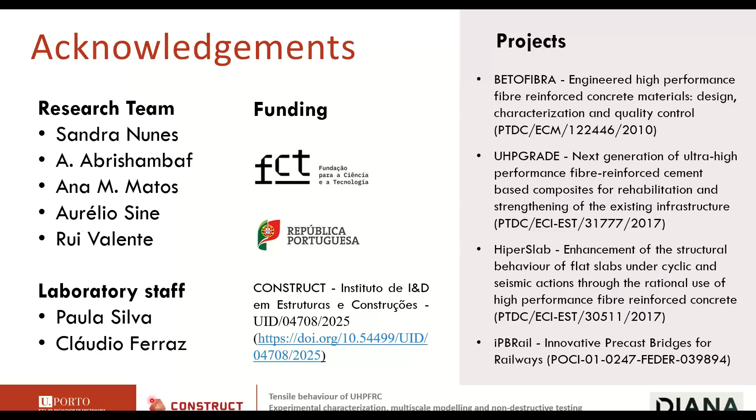So first and foremost, I would like to acknowledge all the persons that contributed to the work that I'm going to present to you today. It's far from being a work from a single person. So I'd like to thank Sandra Nunes, my colleague, who really started this research line here at Porto back in 2014, maybe, in this project over here, and then Amin Abrishambaf and Ana Matos, Aurélio Sine, Rui Valente, so all the researchers that contributed a lot to what you will see here today, and also to the laboratory staff that did a lot of work on the experimental part of what I'm going to be describing.

So, what is UHPFRC? That's I would like to start here. So, it's an amazing material, actually. In very simple terms, it's a composite which has a cementitious matrix, and fibers, which are usually steel fibers.

So the matrix, you can develop your own, but it's readily available today as premix that we can acquire. Typically the matrix is constituted by cement, silica fume, and then other supplementary cementitious materials like fly ash, limestone powder, many options we have. So the water binder ratio is very small, below 0.2. And of course, we need super plasticizers and other admixtures to make the material self-compacting, which is also a very attractive feature of this material. So it's flowable and doesn't need vibration.

So to have the properties that we need, typically we have to introduce a large amount of steel fibers, much larger amount than standard fibre-reinforced concrete. So usually short steel fibers, as you see here, and typical dosages between 160 and 320 kilos per cubic meter, which corresponds to fiber volumetric fractions between 2 and 4%.

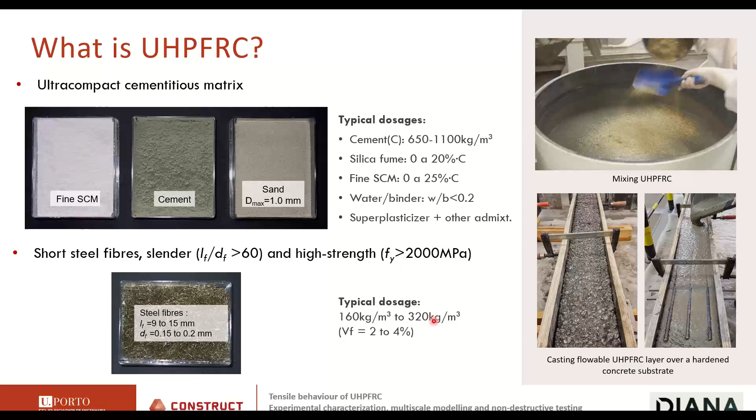So the mechanical properties are really distinguishing. So this material really stands out from conventional concrete. So the unit weight, it's not much heavier than standard concrete. The compressive strength in typical compositions can vary between 130 to 200 megapascals without heat curing. If we have heat curing procedures, we can get higher values sometimes.

Yeah, so it has a high limit of elasticity. So the stress at first cracking can vary according to the composition, but typically between 7 and 10 megapascals. And depending on the fiber content, we can have tensile strength, post-cracking tensile strengths that can go up to 16. You can see larger values, but these are the most typical ones.

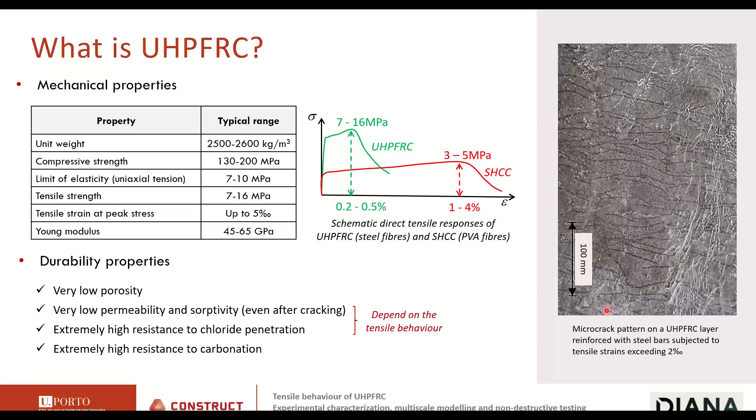But some of these durability properties depend on the tensile behavior. If you have a UHPFRC that is capable of forming this tight array of cracks, then it means it can maintain its durability properties even under large tensile strains.

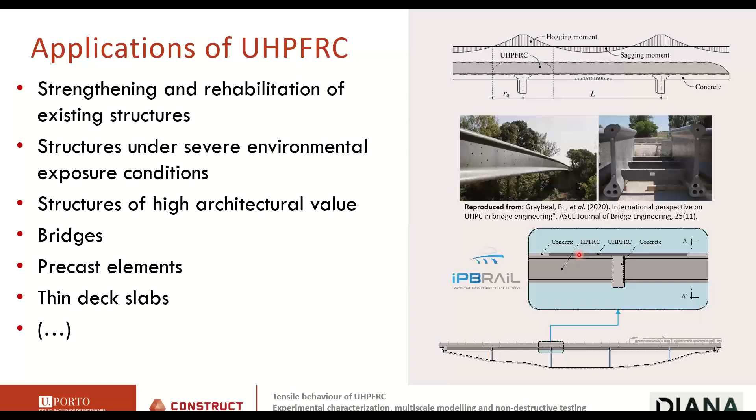In precast elements, here at Porto we had a recent project where we tried to validate the concept of using UHPFRC in the hogging bending moment region of precast bridges.

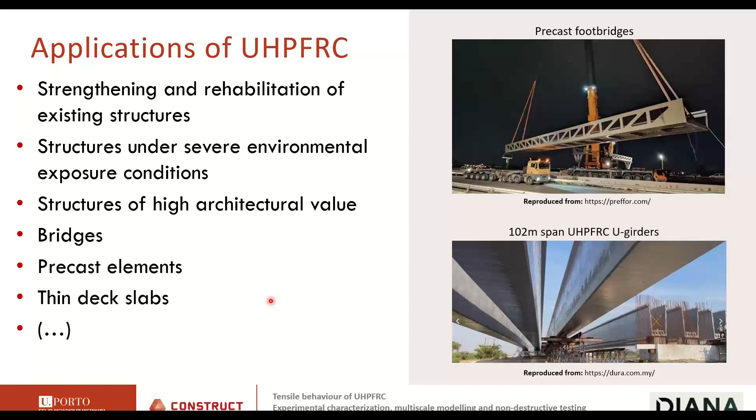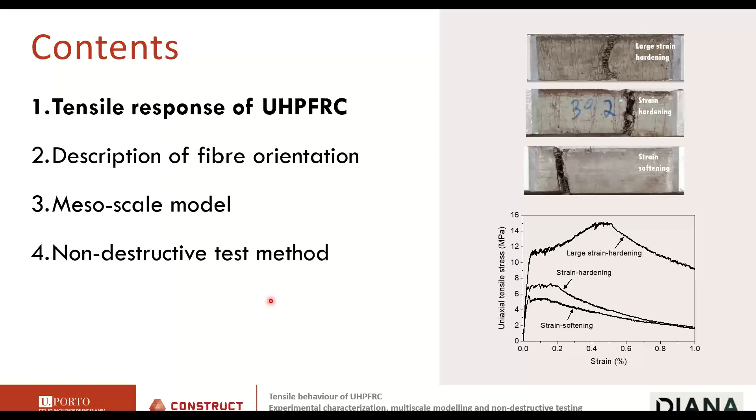So the contents of my presentation will be as shown here in this slide. I will start by making a description of the tensile response of UHPFRC based on what we see in experiments.

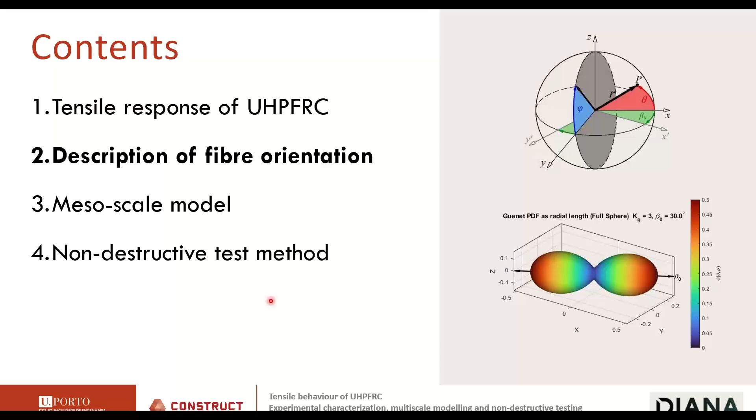Then I will discuss how we can describe fiber orientation, because as we will see, fiber orientation is very important to the tensile response. Then I will show a meso-scale model that is able to predict or simulate the tensile response of the material.

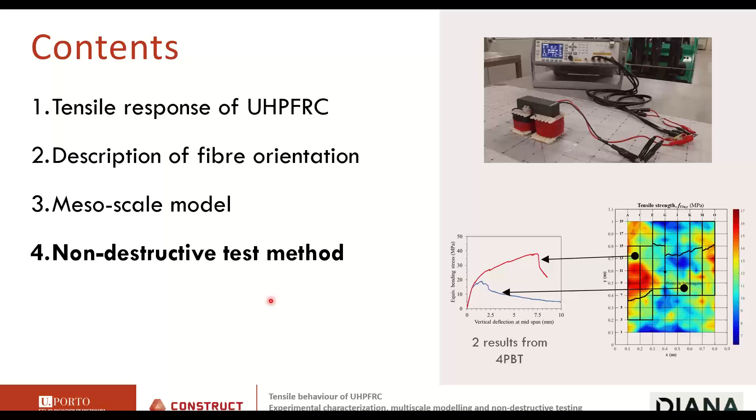And finally, a non-destructive test method that we can use to get the properties we need to feed our models, so that we can get the tensile response, which, as I will tell you, is a function of the fiber content and fiber orientation.

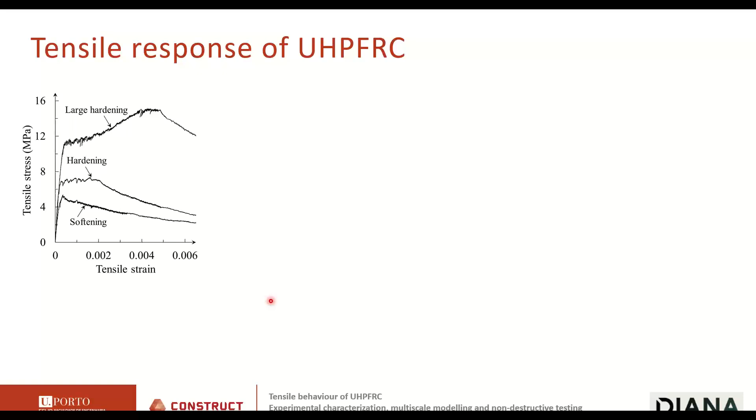So the tensile response of UHPFRC is well illustrated here in this plot. All these curves have been obtained with the same cementitious matrix, same types of fibers, but different fiber contents and different fiber orientations.

Typically, if you want to do a structural analysis or a finite element analysis, you can model this behavior by a bilinear law. It's sufficiently accurate to have a bilinear law here up to peak stress.

And so this part of the constitutive law describes the stress versus strain behavior of the material before you get to the peak stress, because at peak stress, one crack will localize somewhere along the specimen, and then all the deformations will be localized on this crack.

So from the peak onwards, instead of a stress-strain model, we need a stress crack opening model, like what we do for concrete.

So in the context of finite element analysis, this part of the constitutive law is independent of the finite element size, while here you need to define a fracture energy and then use the crack band theory to apply in the finite element analysis using continuum elements.

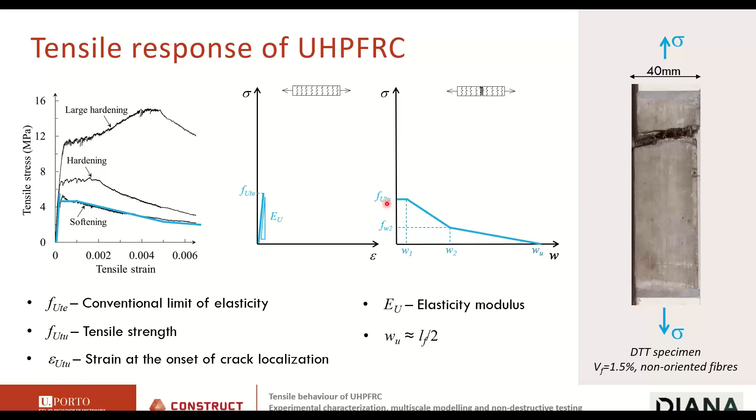So in this case, we need a linear elastic branch up to the peak stress and then a stress versus crack opening relation for the post-peak part of the tensile response. So in this case, the post-cracking tensile strength is smaller than the conventional limit of elasticity.

So tensile response is decisive in many structural applications and depends on the fiber to matrix interaction. So the way we develop the mix design can be tailored to get the behavior that we want. It depends on the fiber content, which of course can also be tailored in the mix design, but also depends on the fiber orientation, as we have seen.

But the fiber orientation depends on external factors that we cannot control when we are designing the mix. It depends on the geometry of the mold, on the placement process, and on the rheology of the material in the fresh state. Some evidence here taken from the bibliography.

So here, this is a vertically cast panel from which several specimens were sawn to test under uniaxial tension. And you see here the range of responses that was obtained. This is described in the doctoral thesis of Oesterlee from the EPFL.

So the same material, same theoretical fiber content, gives a very large range of tensile responses in the same panel.

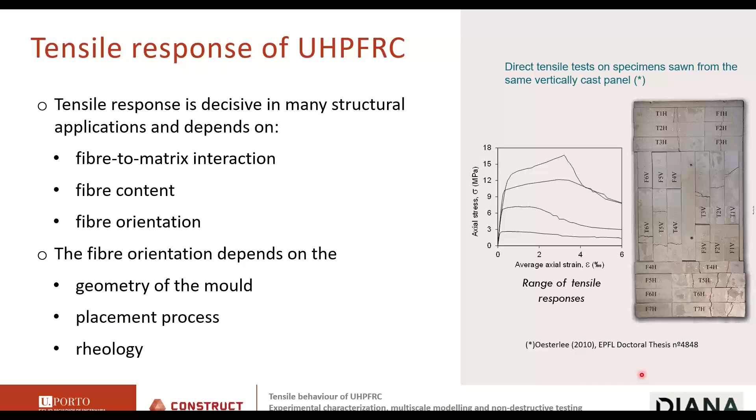And here, another interesting result is shown. This is the same UHPFRC mix that I described at the beginning of this presentation. We can see that the black curves correspond to specimens with 3% of fibers and the light gray to 1.5% of fibers, so half the fiber content.

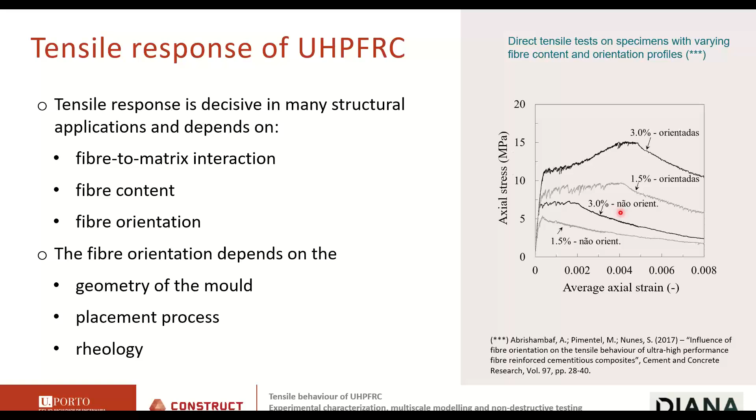What do we see? If we orient the fibers properly, we can have a better tensile behavior than what we would obtain with twice the fiber amount, but with the fibers not oriented. So the orientation of the fibers can have an effect that is even more important than the fiber content.

So to sum up, there's no intrinsic tensile response to this material. It depends on how you cast, and on the factors that I've described in the previous slide. The tensile response may be direction dependent, as could be shown in the tests before. The tensile response of the material in the structure can be different from that obtained in laboratory tests. And typically, this leads to overly conservative design approaches because designers need to cover worst-case scenarios.

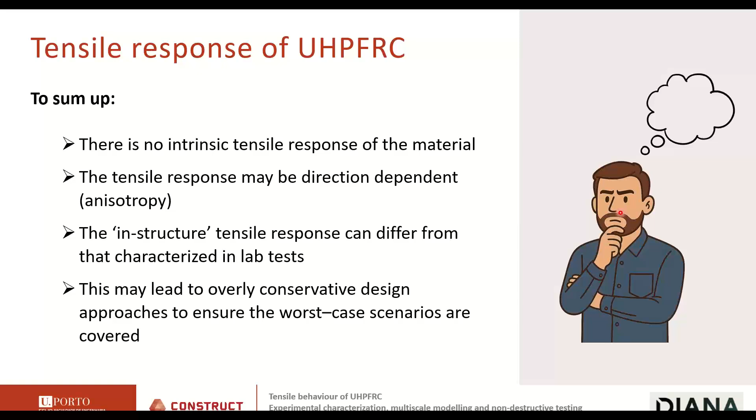So, which questions do we want to answer? They're not easy questions. Can we model the effect of fiber content and orientation on the tensile response of UHPFRC? Can we really get the stress elongation curve under direct tension observed in tests with a dedicated model? Can this model provide us the micro crack spacing? Can we describe an anisotropic tensile behavior? Can we use this information for analysis at the structural level to scale up this information? And also very important, can we get information about fiber content and orientation without destroying my specimens, using a non-destructive testing technique? These are the answers we will try to provide during this presentation.

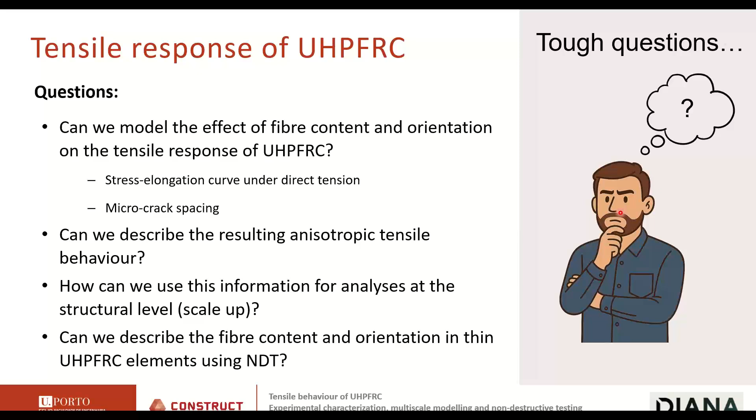We need to have a description of the fiber orientation. This can be very complicated, but at the end we will need only very simple scalar parameters. The orientation of a fiber can be described by two angles: the orientation angle theta, and the azimuth. Imagine the JK plane is your crack, and theta equal to 0 is a fiber perpendicular to your crack. Theta equal to 90 degrees is a fiber parallel to your crack, so it's not working. The azimuth is the other angle needed to completely define the fiber orientation state. P here is the unit vector in the direction of the fiber.

The most complex and most general methodology to describe the fiber orientation is through a fiber orientation distribution, which has to have some properties that we will discuss, using some stereological principles to get the information we need. A simpler way is to use second-order orientation tensors, which can also be helpful, but even simpler is using scalar orientation parameters, and we will focus a lot on this one.

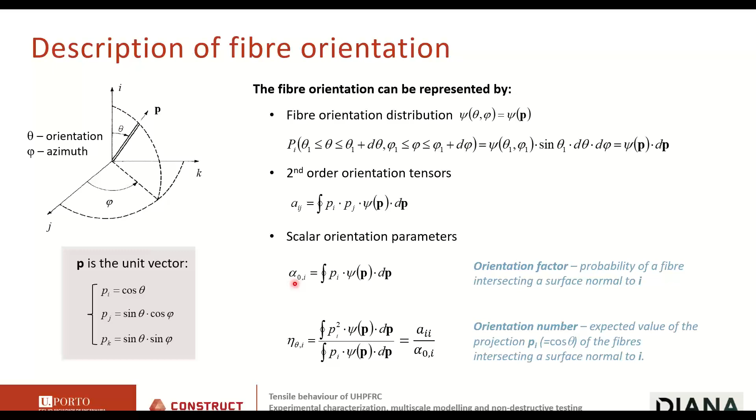So the fiber orientation factor. You have here the definition, but I will go back to this. The fiber orientation factor can be seen as the probability of a fiber intersecting a surface normal to direction I. This means, if this is a probability, the maximum value of alpha is 1 and the minimum value is 0. So if alpha is 0, you will not find fibers in your crack. If alpha is equal to 1, this means all the fibers you put will intersect the crack.

One interesting probability density function to describe the fiber orientation has been proposed by Guenet in his doctoral thesis, and it has very interesting properties. It's periodic. What does this mean? We cannot distinguish a fiber from another one oriented 180 degrees to the other side, so it's the same fiber. The function must repeat itself every 180 degrees.

You see here the two angles we need to describe the fiber orientation, theta and the azimuth angle. It's also useful to have a direction of preferential fiber orientation, the direction along which your probability density function will have the highest value. The only parameter that governs this function is the Kg factor, which controls basically the degree of anisotropy of the fibers with respect to the preferential direction, typically the casting or flow direction of the material.

Physical interpretation of this: if you put Kg equal to 0, this means the probability density function will have a constant value no matter the fiber orientation. This can be represented at the right using these figures. The surface is defined by this function, and the value of the function is the radius connecting the origin of the reference system to the surface. Here you see that no matter the orientation of this vector, the radius is constant, so we have a sphere, constant radius.

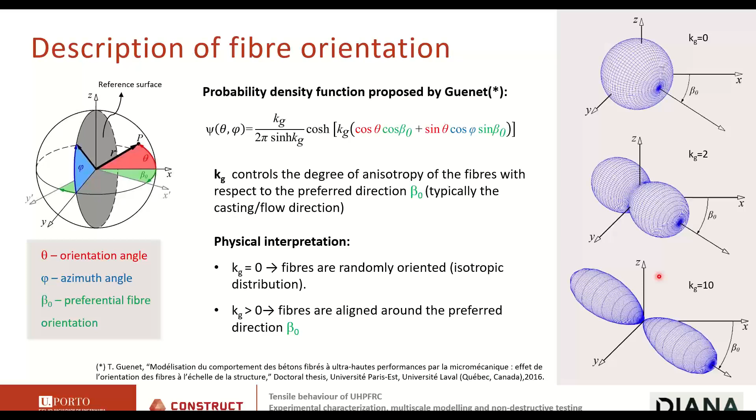As we increase the value of Kg, we start having preferential fiber orientation. You see that the maximum radius, the maximum value of the probability density function, is achieved here or 180 degrees to the other side. These are different representations of the fiber probability density function for different values of Kg. This would lead to an isotropic behavior, the same in all directions. Here it's anisotropic, and here it's very strongly anisotropic. Using some math, we can calculate the fiber orientation factor based on the probability density function of the fiber.

Well, the equation is not simple, but the results are very interesting to analyze. So what does this plot here at the left tell us?

With Kg equal to 0, we have an isotropic distribution of the fibers, so the fiber orientation factor takes the value 0.5, no matter the direction of your crack. The red line corresponds to the fiber orientation factor of a surface normal to the axis X, and the green curve to the perpendicular surfaces.

As we increase the parameter Kg, that leads to increased anisotropy in the fiber orientation distribution. The alpha values start growing in the direction along which the fibers are aligned, but this comes at a cost that the alpha value for the perpendicular directions decreases. This explains the anisotropic response of the material when you have oriented fibers: you will find more fibers in one direction, less fibers if the crack opens in the other direction.

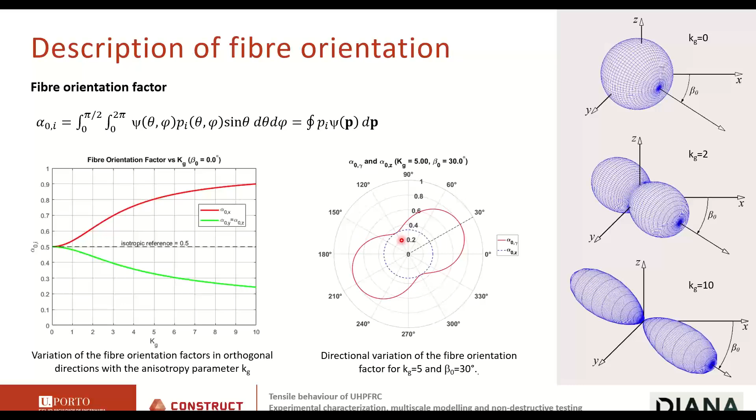Here's another very interesting picture. Using Kg equal to 5, corresponding to this line here, I'm showing the value of alpha, the fiber orientation factor, along any direction. Here I use as preferential direction of fiber orientation 30 degrees, so you see the maximum value of the fiber orientation occurs at 30 degrees. But if you go away from this 30-degree alignment, the fiber orientation factor decreases in value. Here the fiber orientation factor is given by the radius, so this is a polar plot.

Can we get this experimentally? Yes, we can. We can polish and cut samples from our UHPFRC elements, polish the surfaces, and do image analysis with algorithms that count the fibers, and they can even tell us the orientation of each fiber.

The fibers have a circular cross section. If they are inclined with respect to the polished plane, they will appear as ellipses, and the cosine of the angle of fiber orientation can be obtained from the largest and smallest diameter of these ellipses. It can be shown that the fiber orientation factor used throughout this presentation can be obtained through this simple equation: the fiber orientation factor in this surface is the number of fibers per unit area, times the cross-sectional area of one fiber, divided by the volumetric fiber fraction.

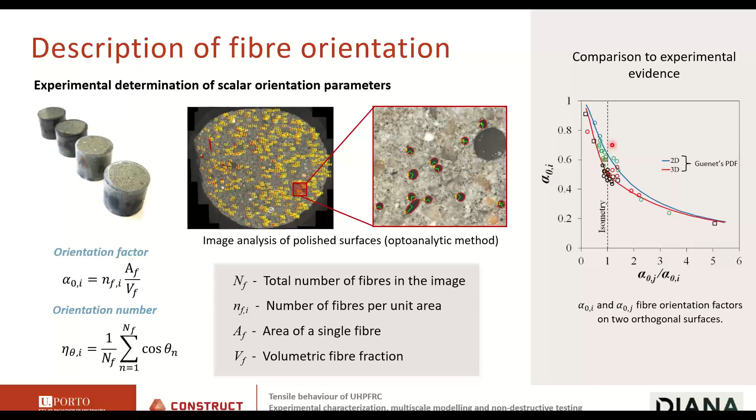Also important, as we will see, is another concept: the probability density function of the orientation angle of the fibers that intersect our crack—not all the fibers in the volume, but the fibers that intersect the crack. It can be shown that it's given by this equation.

When we have well-oriented fibers, so a very large value of alpha 0, we see more fibers with orientation angles close to 0, which, if you recall, means the fiber is perpendicular to the crack. We see very little fibers with large orientation angles. These fibers, as we will see, are not always effective, so if the fibers are well oriented, they are almost all effective.

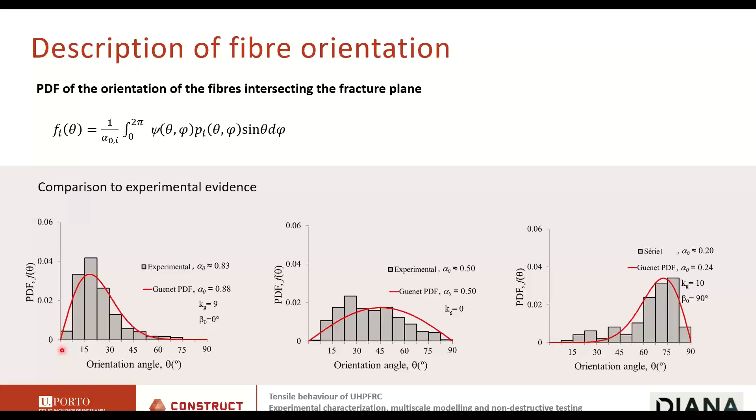The thing is that you will never find fibers at 0 degrees. Theory says that the probability is null to find fibers at 0 degrees. So you always find fibers with some inclination. So this part of the curve is not really that important. What's important is here between 10 and 60, let's say. So a constant value is not a very poor representation of reality, and it's very simple. And we adopted this.

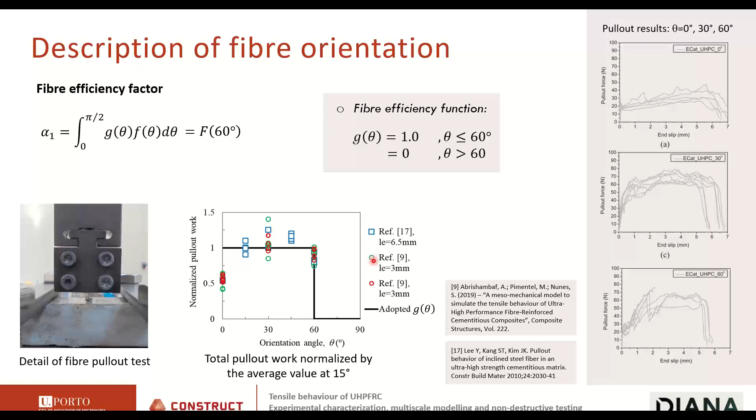And it's, as we will see, so we can determine under this assumption, we can determine the fiber efficiency factor from our image analysis of the polished specimens. And we have here the dots corresponding to the experimental values. So this plot relates the fiber efficiency with the fiber orientation.

So what do we see? Fiber distributions with very large fiber orientation factors, the fiber efficiency factor is close or very near to 1. So all the fibers are effective. If you have very low fiber orientation factors, most of the fibers are ineffective. So you have fewer fibers crossing the crack, and most of those fibers are ineffective for the tensile response.

So we proposed here a semi-empirical equation that allows getting the fiber efficiency factor if you only have the fiber orientation factor, which, as you will see, will be very useful.

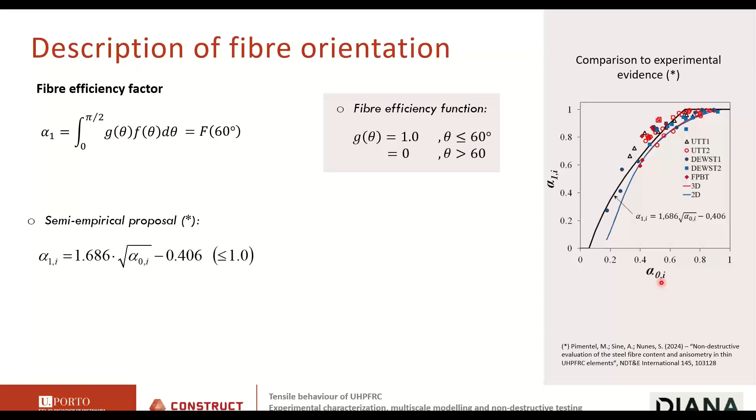So the description of the fiber orientation is done. Let's now go to the model that we have to really describe the tensile response of the composite. So the concept that we are using is based on the work of Jungwirth at the EPFL.

So basically, we are able to model uniaxial tensile tests. We consider that this is our control volume, the test specimen. And how does this work? We consider that the matrix cracking strength is randomly distributed along the specimen. So you have here a number of parallel potential cracks, some of which will be activated during the loading process.

As we will see, a crack very close to one that has been activated cannot be activated. We will provide some criteria for this. So some of the cracks will be activated during the hardening stage, and then until you reach the peak stress and one macro crack will form, the material will enter the softening stage, and the remaining cracks will unload. So we consider that in our specimen, the fiber content and orientation is all the same.

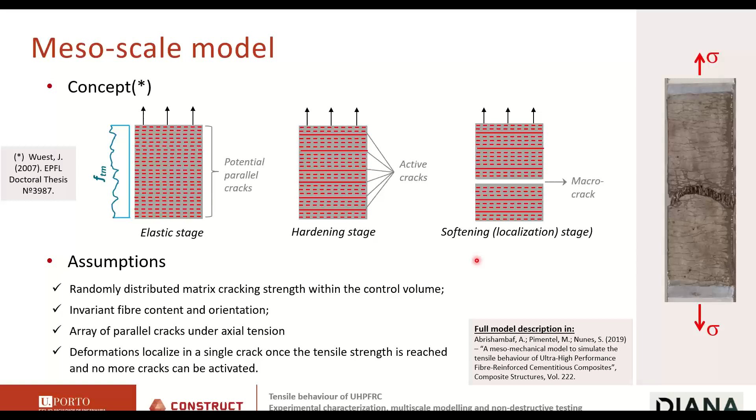How do we simulate multiple cracks? Because the axial stress is constant on the specimen, how do we allow for multiple cracking? As I told you, the tensile strength of the matrix is randomly distributed. We use a normal distribution defined by a mean value and a standard deviation, so all these cracks have different tensile strengths for the matrix component. And then we also define a minimum crack spacing.

For those of you used to reinforced concrete design, you see some resemblance here with the average crack spacing in reinforced concrete. You can think of alpha 0 times the volumetric fiber fraction as the effective reinforcement ratio that we consider in structural concrete, in reinforced concrete.

But then we use an extra parameter, which we call alpha 2. If the fibers were rebars, continuous filaments, this alpha 2 would be equal to 1.0. But the fibers are not continuous filaments; they have a small length, so they are not as effective in controlling the crack spacings as if they were continuous filaments.

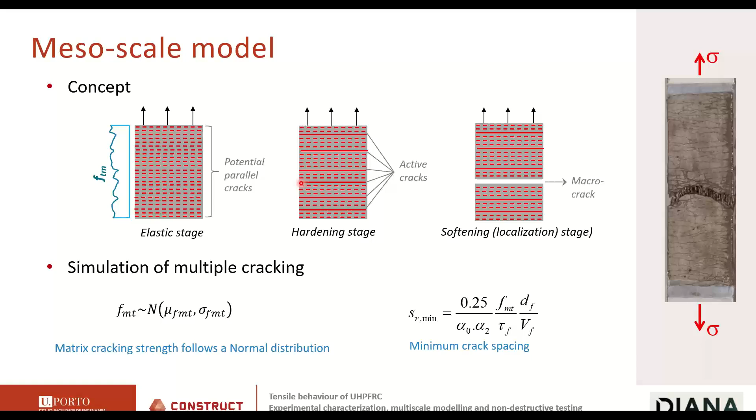So this is a model parameter. How do we use this? For instance, if this crack has opened, and the neighboring cracks are at a distance smaller than the minimum crack spacing, we don't allow these cracks to open, and only the cracks spaced more than this value can be activated.

So we need to describe the response of each of these cracks, and there are many of them on the specimen. This is the behavior of a single crack. It starts at a crack opening of 0 and continues until complete fiber pull-out. The total response at each crack is the sum of 3 contributions.

This is based on the works of Victor Li, referenced in this paper. The biggest contribution, the most important one, is due to the fibers - it's the fiber bridging stresses, sigma.

Of course, there's a small contribution from the matrix, very small. And a small contribution of what is called in the literature fiber pre-stressing, which is basically the elastic stresses locked into the fibers prior to cracking, which then after cracking are gradually released.

Important also to note that the fiber contribution can be divided into 2 stages. First we have a fiber activation stage where the forces in the fiber increase, also called the fiber debonding stage - the bond between the fiber and the matrix is being activated in this stage. Then suddenly the fibers start to pull out. The post-cracking tensile strength of the cracks is fairly given by the fiber contribution.

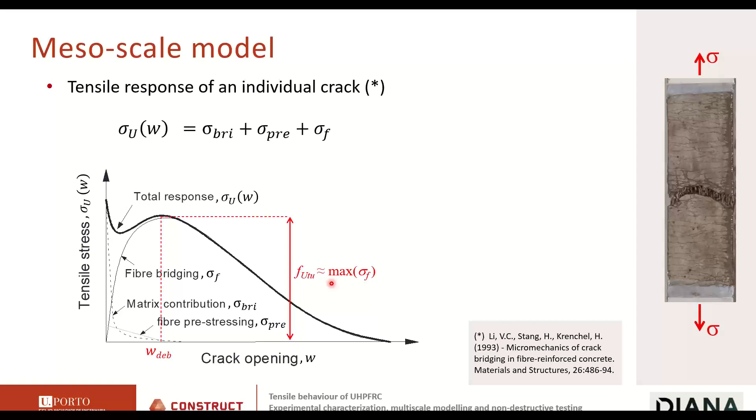I will not go into too many details. So if I want the contribution of the fibers, I have to integrate through all the possible fiber orientations and all the possible fiber embedment lengths.

Here you see the pull-out force of a fiber oriented at an angle theta with an embedment length LE, as a function of the crack width. To make this simple, we will consider that this is the product of a function that does not depend on the fiber orientation times the fiber efficiency function, which allows us to mathematically simplify the equation that you see here.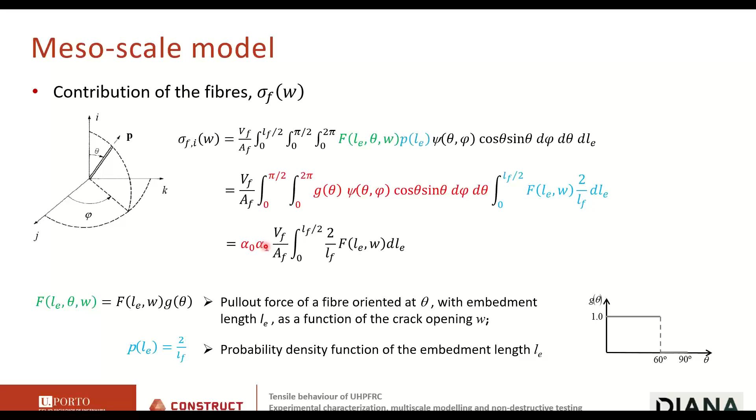So the red part is only related to fiber orientation. It can be shown that the red part here is the product of alpha 0 times alpha 1, so the fiber orientation times the fiber efficiency factor.

After the work of Thomas Pfyl in Zurich, he developed a very clever closed form solution for this integral, which requires some simplifying assumptions - basically you have a function that is a function of the crack width that varies between 0 and 1, and then a constant value over here, which is basically the post-cracking tensile strength of the material.

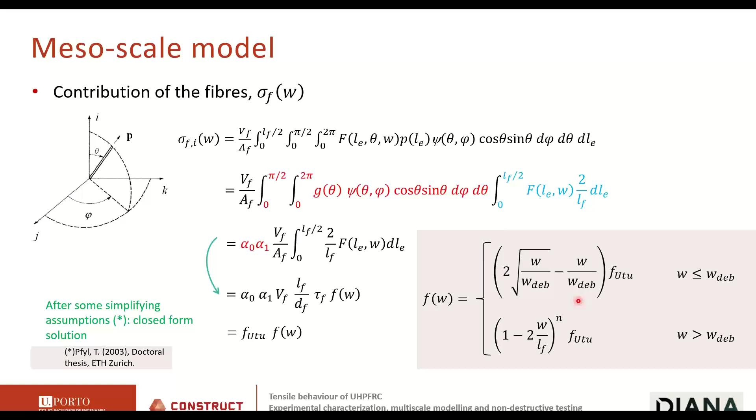Here you have the equation for this function for the debonding or fiber activation stage, and here for the pull-out stage. So here we have this value, the fiber post-cracking strength, or the maximum value of the contribution of the fibers.

Let's look a little bit at this equation. You see here a product of two parameters that depend on fiber orientation, but still related to fibers: the fiber content, the fiber volumetric fraction, and the fiber aspect ratio, the length of the fiber divided by the diameter. All this is fiber related, and this can be lumped into a single scalar value, what we call the fiber structure parameter.

And this is the rigid plastic fiber-to-matrix bond strength that depends on the matrix and the shape of the fibers. So if this equation is correct, then I can plot the tensile strength as a function of the fiber structure parameter, and I would expect a straight line with the slope being the bond strength.

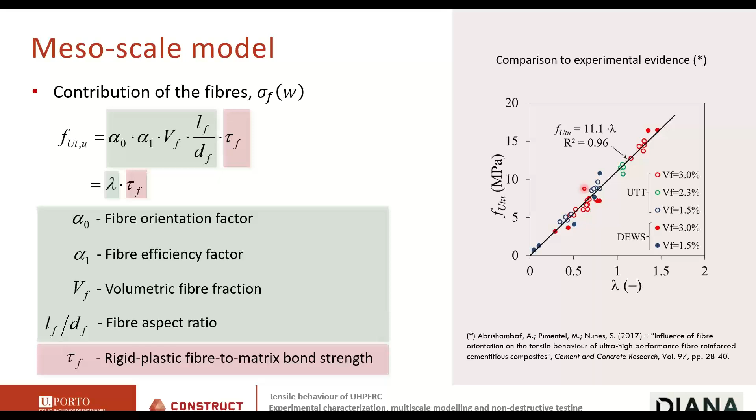Well, this agrees extremely well with what we observed in the experiment. We measured all the fiber orientation factors, the fiber efficiency factors in these specimens, and we see that the linear trend shows a very strong correlation. Then you have here some equations to describe the small contributions of the matrix and the fiber pre-stressing.

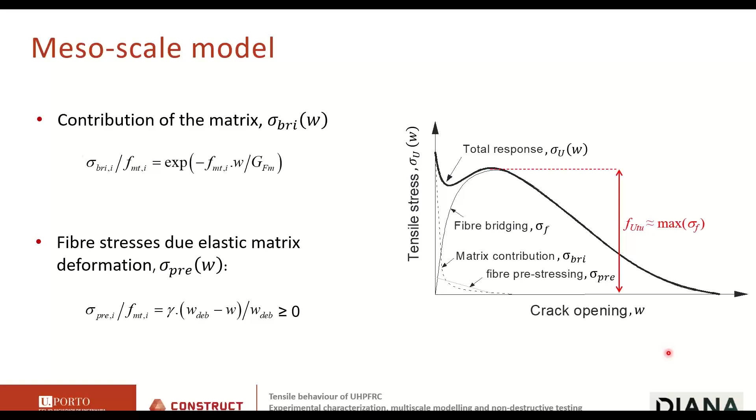Well, how does the model work? The model requires some material properties as inputs: E modulus of the fibers, E modulus of the matrix, fracture energy to get the contribution of the matrix, the fiber-to-matrix bond strength. Then some model parameters which are quite small, such as the mean value of the matrix cracking strength.

We say this is a model parameter because we introduce this as a ratio: the coefficient of variation of the matrix cracking strength and the crack spacing parameter, and then all the fiber related parameters, which are lumped in that fiber structure parameter that I just showed in the previous slide.

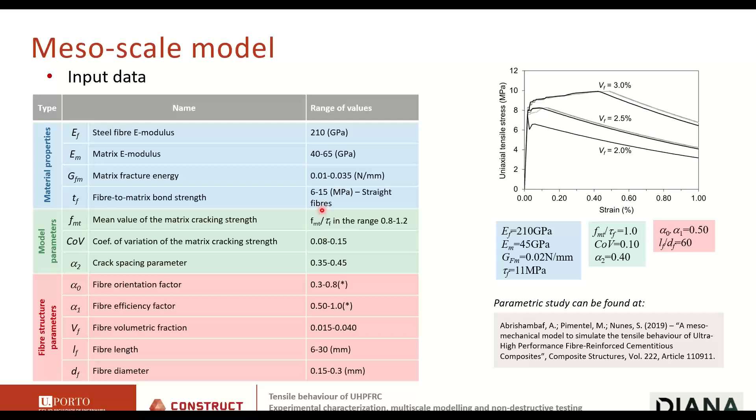So using this set of data that I showed here, you see what the outcomes of the model are for instance with different fiber contents. You see that for a given fiber content, you have different curves. Don't forget that every time we run the model, we have a random distribution of the matrix tensile strength, and different runs will lead to slightly different results, mostly on the crack formation stage.

So how does this compare with experiments? Well, it compares reasonably well. You see here tests on UHPFRCs with different fiber contents, different fiber orientations, and with the same set of material properties and model parameters, we could get a reasonable fit to what we observed.

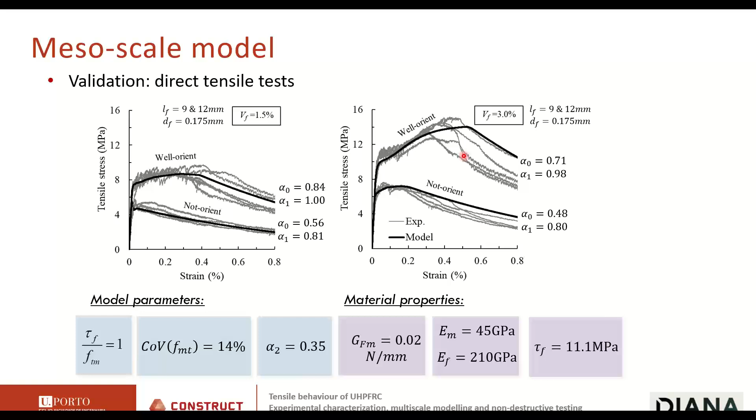And if you remember, where did we come from? We wanted a simple model to put in our finite element models that is bilinear, described by the conventional limit of elasticity, tensile strength, and described by the strain at the onset of localization.

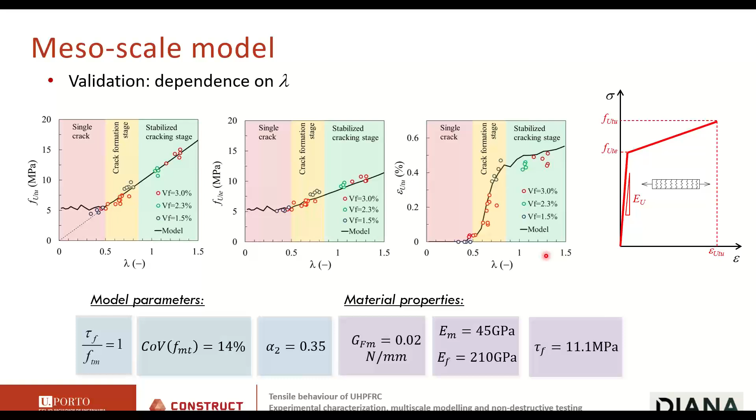You see these three parameters here in these three plots as a function of the fiber structure parameter, that parameter that lumps all the effects of the fibers. We see that the model describes this very well throughout a wide range of values of the fiber structure parameter, and even the mean crack spacing.

Here you see different specimens with different values of the fiber structure parameter, which correlates very well with the mean crack spacing. Large values of this parameter lead to very small crack spacing, so the specimen entered the stabilized cracking stage.

Here, most common in poorly or randomly oriented fibers, you have specimens in the crack formation stage, so the cracks start being fewer, and the distance between them becomes larger. And then, of course, if you have a single crack, crack spacing is undefined.

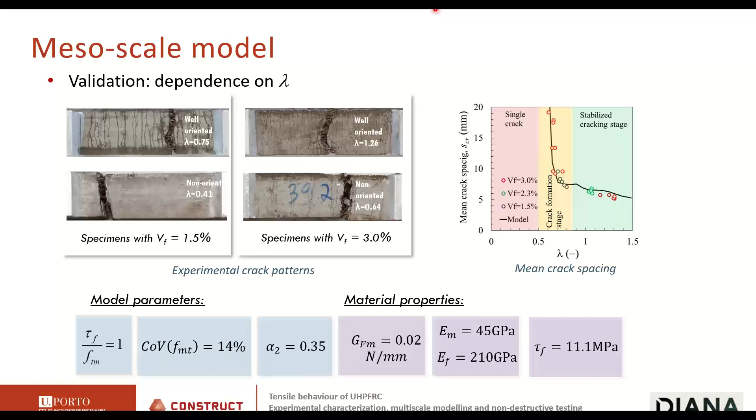So how do we use this? We must go from anisometry, the description of the different fiber orientations in different directions, to the mechanical properties of the material. Using these models, it's possible.

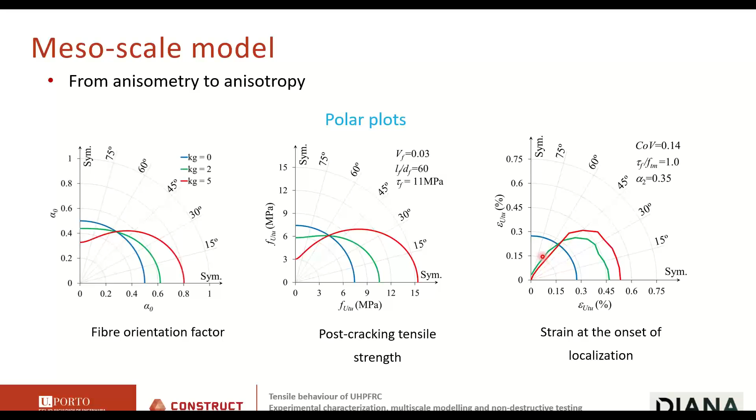Applying our equation for the tensile strength, we can go from here to the tensile strength. Applying the model that I have described, we can even get the strain at the onset of localization in every direction. We can describe the anisotropic behavior of the material if the fiber orientation is relevant.

The good news is that we really don't need to use this meso-mechanical model, this meso-level model, in our finite element analysis. We can use much simpler surrogate models. We can derive very simple equations that give us the parameters we need: the strain at onset of localization, the conventional limit of elasticity, the post-cracking tensile strength. All this can be obtained with simple functions, which of course can and should be calibrated with the meso-mechanical model.

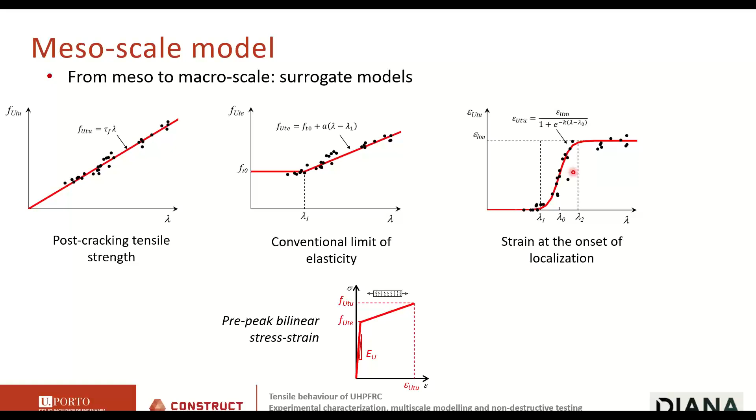So a small section now about the non-destructive method. We saw that the orientation of the fibers governs the tensile behavior. It would be good if we could have a procedure so that we can measure the content and orientation of the fibers in the specimens that we cast.

So we developed a non-destructive test method following the concept previously introduced by other authors, Ferrara, Faifer, which is based on a U-shaped magnetic probe on which we induce a magnetic field. It's a good idea to use the magnetic properties of the steel fibers, simply because if we measure the relative magnetic permeability of our material, we are sure that this is only related to the fibers. The relative magnetic permeability of the matrix is the same, for engineering purposes, as vacuum. No matter if you cast the element at 1 day, 2 hours, or 80 days, it's constant, always the same value. So any variation in the relative magnetic permeability is only related to the fibers.

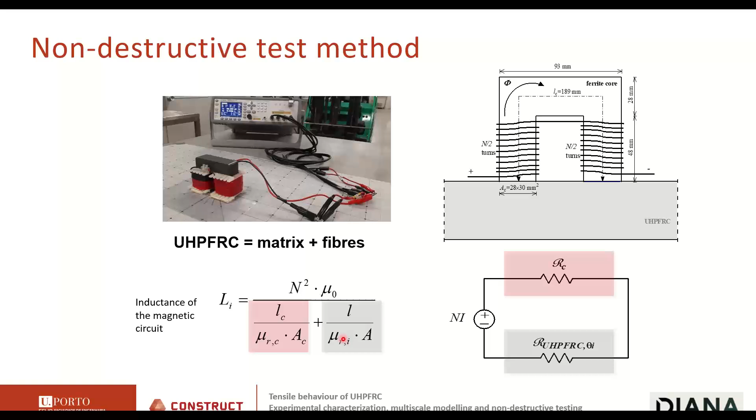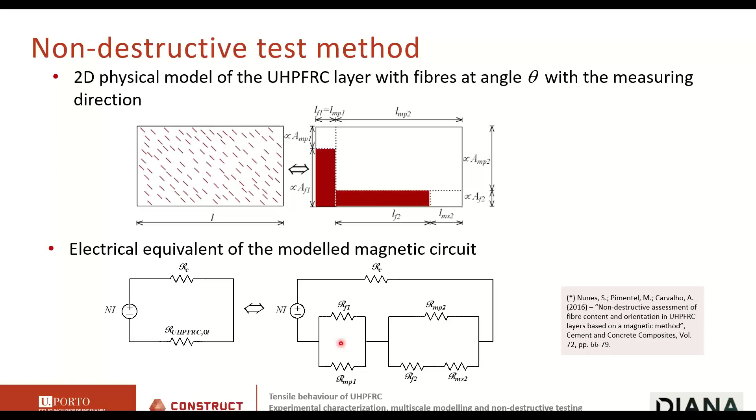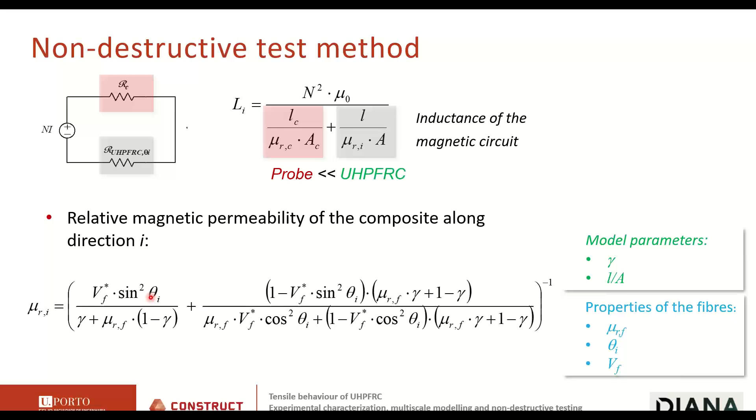The complex part here is the determination of the relative magnetic permeability of the composite. So we developed some models to estimate a theoretical value for the relative magnetic permeability as a function of fiber orientation. This is described elsewhere. We found a complicated equation, but you can put it in an Excel spreadsheet, which basically gives you the relative magnetic permeability as a function of the fiber content and orientation of the fibers. Of course, our fibers can have random orientations, so we generalized this concept to cases where you have fibers with different orientations.

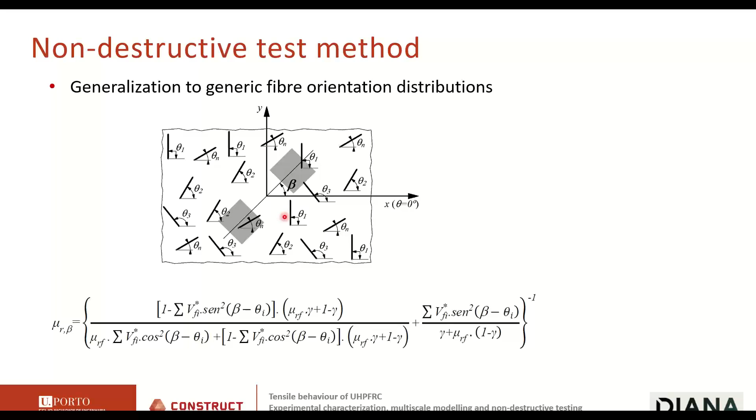Let's see how this compares to experimental evidence. The relative magnetic permeability of the UHPFRC can be obtained very simply by measuring the inductance of the circuit when the probe is placed in air, and the inductance measured when the probe is placed over the UHPFRC. We took measurements on many specimens with oriented fibers and non-oriented fibers, every 15 degrees.

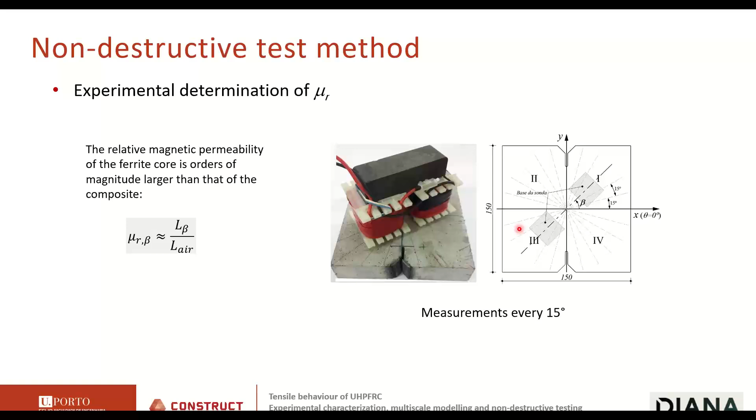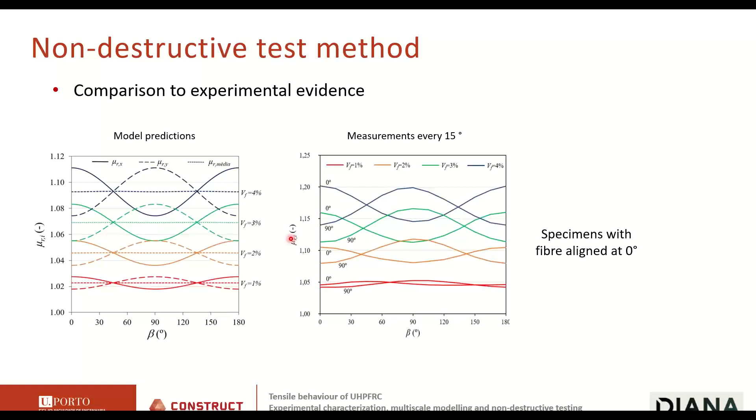This is what the theory predicts: every 15 degrees, if I have a specimen with oriented fibers, I see higher relative magnetic permeabilities, and then they decrease when I am 90 degrees apart, and decrease again. The green curves correspond to a specimen with less fiber content, and the orange... So this is what we get from the measurement. It's not far from what we predict with that complicated equation. We see the same trends.

Also very important, what do we see? The theoretical model predicts that if we average two orthogonal measurements of the relative magnetic permeability—measurement at 0 degrees, measurement at 90 degrees—you get lines that are nearly horizontal. So a good indicator of fiber content is the mean of two orthogonal values, and it can be shown that it's independent of fiber orientation, and good news, it increases linearly with fiber content. We confirmed this with the measurements: it increases linearly with the fiber content.

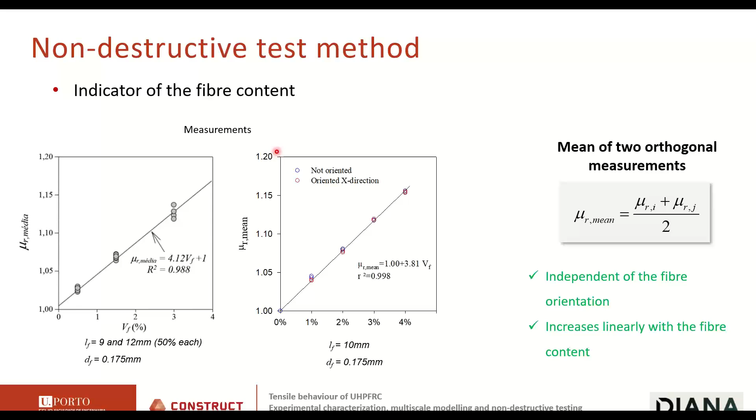If we use a range of fiber orientation distributions more close to what we can find in practice, we see almost a linear trend. And this is actually what we observe. So we can find a linear relation between this fiber orientation indicator and the fiber orientation factor.

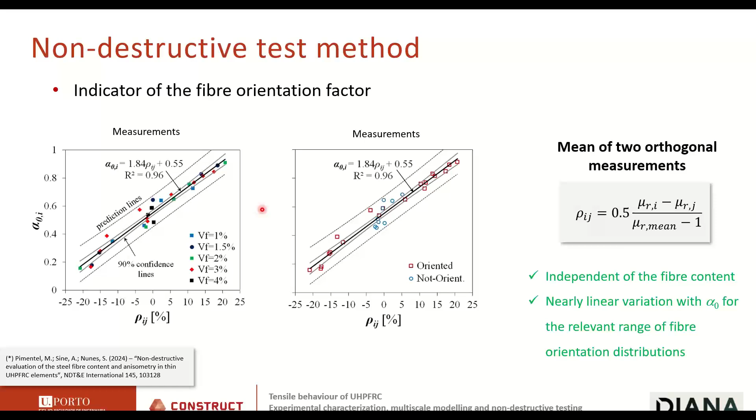So two linear relations, two orthogonal measurements, and we can get the fiber content and the fiber orientation factor on the point where we are measuring. And then we can use this data from NDT to predict the tensile strength, and we did it.

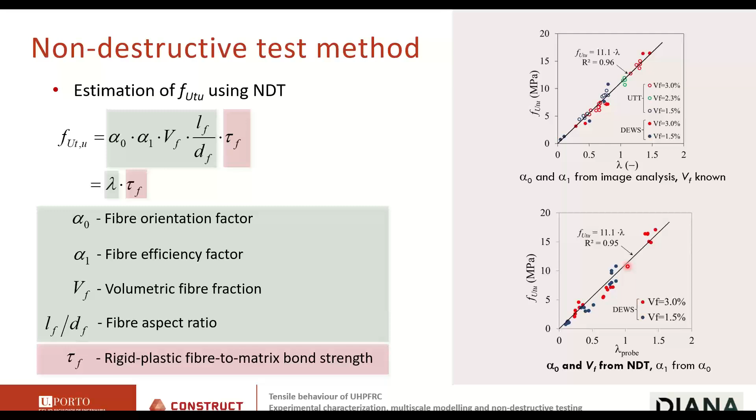So I've shown you this graph before, where we have our fiber structure parameter determined using time-consuming, expensive image analysis. And here we have the same results, but using the NDT data. You see that the results are fairly close, so we don't lose a lot of information by using NDT compared to doing the time-consuming image analysis.

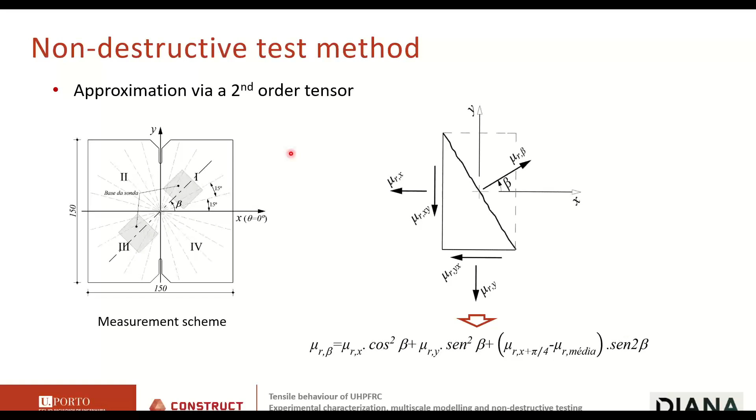The good thing also is that if you want to know the tensile strength along any direction, we can approximate the relative magnetic permeability by a second-order tensor. This means that if we want to know the fiber orientation along any direction, we only need to make 3 non-collinear measurements.

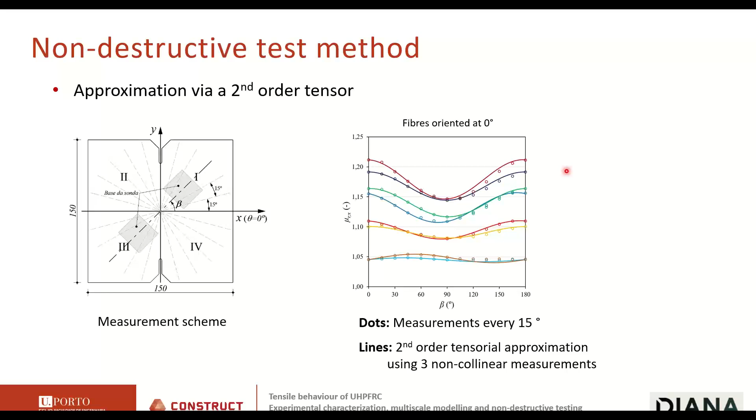This is how the tensorial approximation compares with the measurements every 15 degrees. So the agreement is quite good.

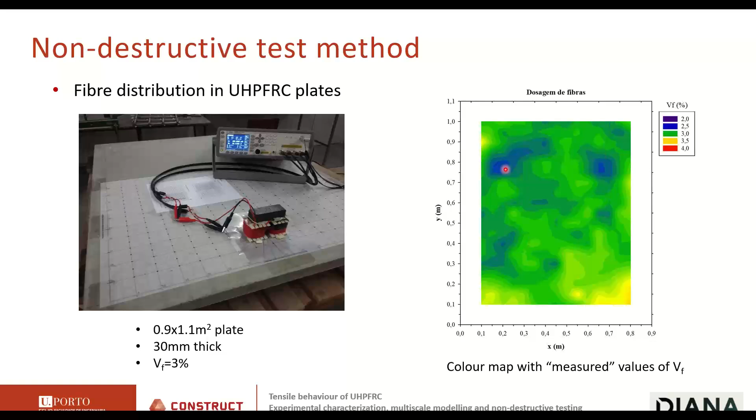Here we have the colour map with the measured values of the volumetric fiber fraction. The theoretical value was 3. We can see values ranging from a little bit above 2.5 to a little bit below 3.5.

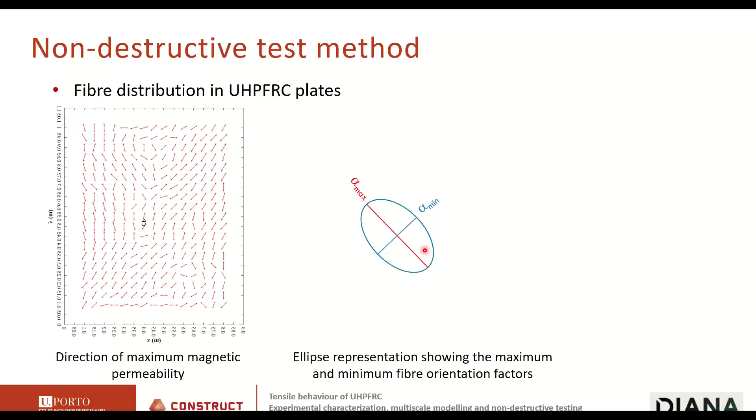Using the tensorial approximation, we can even plot the directions of maximum magnetic permeability, which should coincide with the directions of maximum fiber orientation. We can also represent this using ellipses, where the radiuses of these ellipses are proportional to the fiber orientation factors.

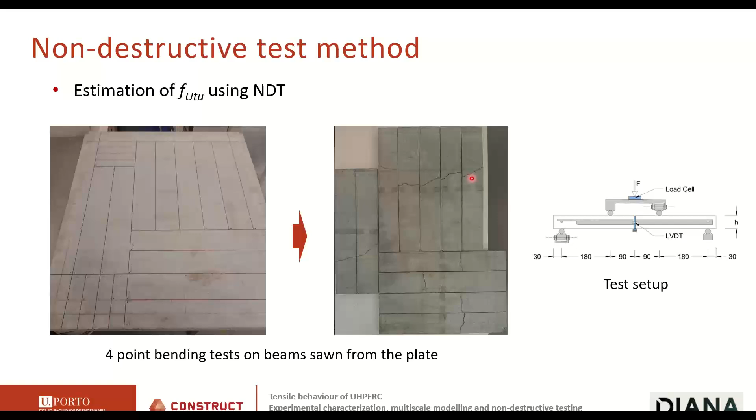So we cut some beams from this large slab, and we tested under 4-point bending, and this is where the cracks appear - the governing crack, the final crack that appeared in the 4-point bending test.

Sometimes the agreement is not perfect because the roughness of the plate on the free surface side was such that the thickness was not really constant throughout all the slab.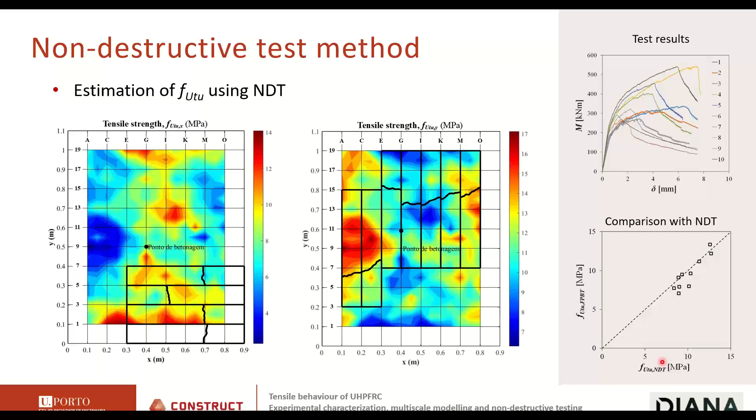This is the full range of results in the 4-point bending tests, and we did some inverse analysis. This is how it compares the result from the tensile strength from the test with the result from the tensile strength estimated by NDT.

And we can use Diana also, so we can try to simulate the behavior of these 4-point bending tests using the information that we retrieved from NDT. So each block that you see here corresponds to the area of influence of one single NDT measurement.

And we introduce different properties in each block according to the NDT data, using the multilinear functions that we have described before, which are fed data from the NDT test method.

So we use the total strain rotating crack model. We are introducing the constitutive law that is suited to the behavior in the longitudinal direction, because it's the direction on which the beam works.

And here you see the results of the simulations of some points. In some cases, the agreement was very good, as I show here. In others, not so much, but typically the agreement is quite good.

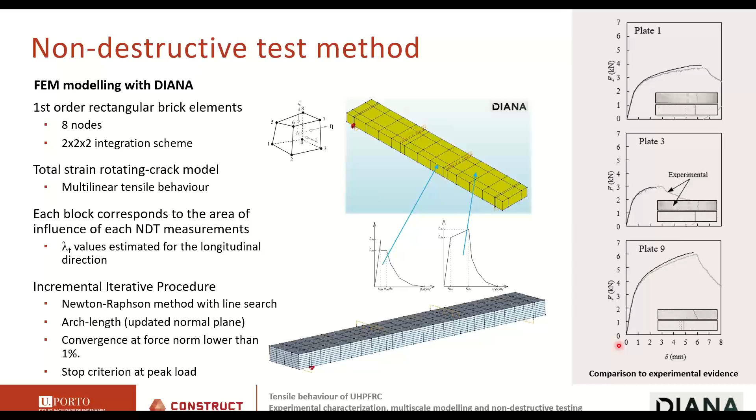So the outcome of this is that we can get data from NDT that can be used in finite element simulations to get the real behavior of the material as placed in the structure.

So this method is being used by the industry already. I include here an application by Preffor, which is a precast company in Spain, specialized in UHPFRC, which is using this method for quality control of their elements.

Here you see the estimate of the volumetric fiber fraction of 4 panels that were cast with different fiber types and fiber content, and the estimate of the fiber orientation factor.

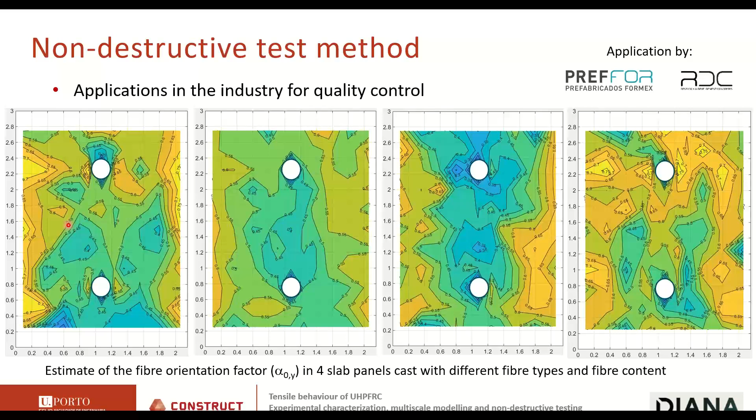So here you don't see values that deviate too much from 0.5, so the orientation of the fiber is really random. And here the directions of maximum and minimum fiber orientation factor.

Simple surrogate models can be used to obtain the parameters for simplified constitutive laws that can be used in nonlinear finite element structural analysis. And the fiber content and orientation in thin UHPFRC elements can be obtained using non-destructive test methods, which can feed the surrogate model.

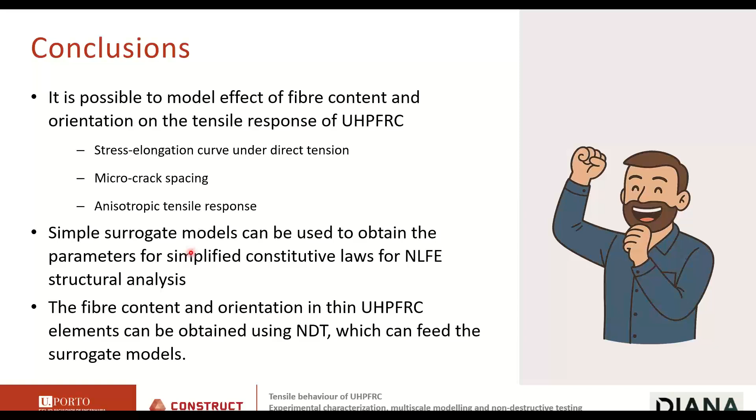Well, this cannot be used if you have rebars distributed in the UHPFRC layer, because this would affect the NDT measurements. So the non-destructive test method only works if you don't have any rebar in its vicinity.

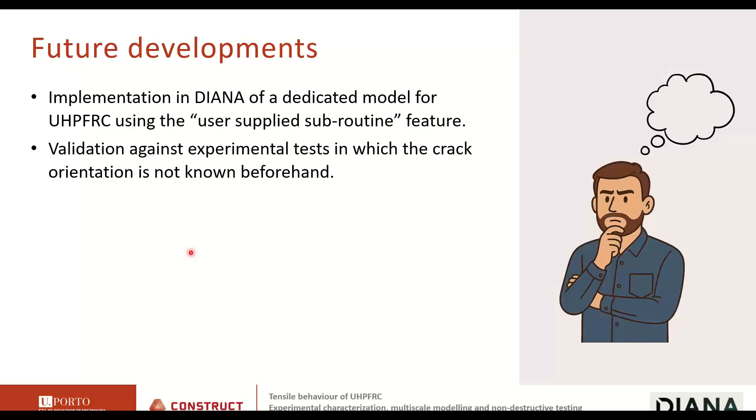So future developments of this: we are planning to implement these ideas in a dedicated model for UHPFRC using the user-supplied subroutine feature, and then validate against experimental tests in which the crack orientation is not known beforehand, because in the simple beams that we tested, we knew that the behavior is longitudinal, so we knew which was the tensile response that we need to introduce. So this is what we are planning to do in the future, and I would be happy to answer some questions. Thank you.